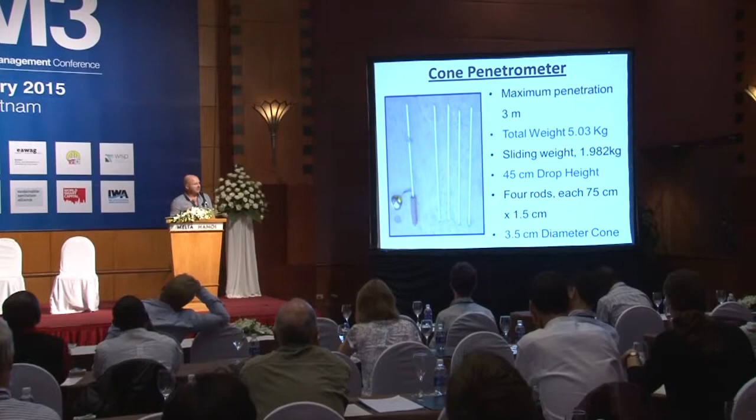Hopefully the video will start up. So it's quite simple, 45 centimetre drop with a 2 kilogram weight, so you have a consistent impact each time that you drop the weight. Quite simply, you measure how much the penetration has gone in each time.

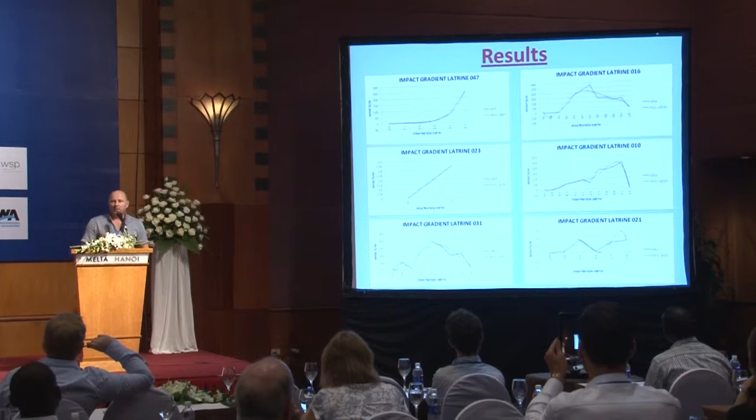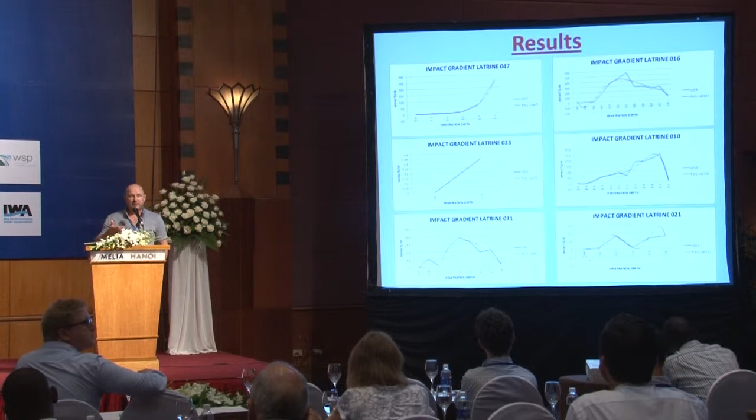So the penetrometer was able to demonstrate that there is a high variety of layers of sludge within a pit latrine. The top left there is what we expected to find: quite low resistance to penetration going to a higher resistance. If we look at the bottom right there, we had low resistance followed by high resistance, followed by low resistance, followed by high resistance. So that indicated that there were a number of different hard layers within the pit latrine. And this was shown throughout many of the pit latrines.

We had instances where it was hard on top, going to water below. So this is just an example of one of the pits. You can see that the pit is actually full, but we took the measurement and we had limited resistance, hard resistance, and then almost no resistance.

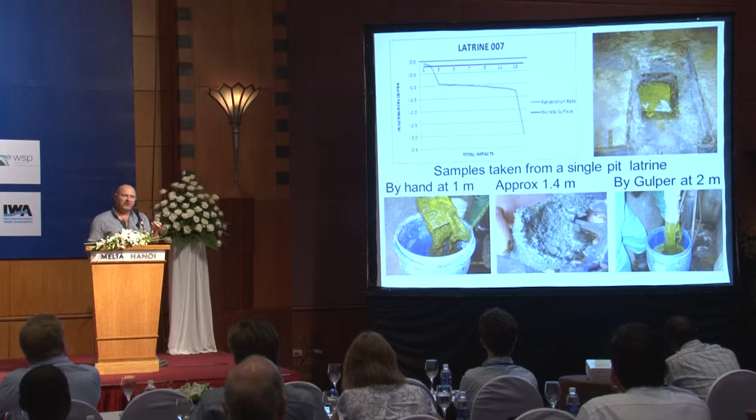So what we then did was we emptied it by hand at 1 metre. You can see there we've got quite a loose sludge. Then at about 1.4 metres I was able to take this sample, which was quite a dense honeycomb sludge, and then using the gulper, we were able to extract the water from below.

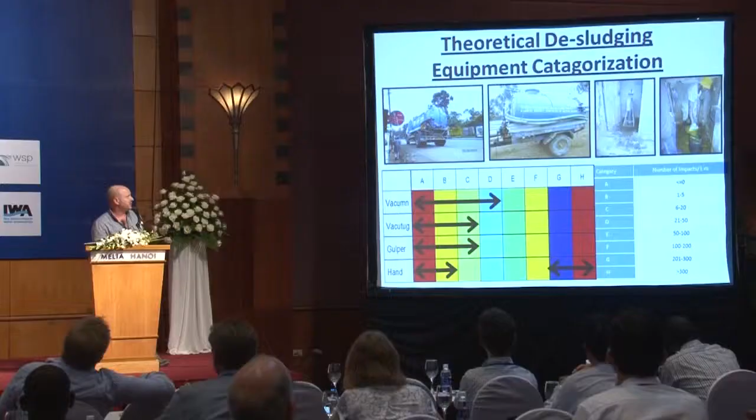So we took the 4 pit emptying technologies that were available in Kibera, which is the municipality truck, the Vacutug, the gulper, and the manual. I went to a number of pits and we tried how these would work within each of the densities, pushing the densities as much as we could. So I came up with a gradient, as you can see on the right-hand side, where we had no impact all the way up to over 300 impacts per metre.

From that I devised a theoretical graph where each desludging equipment could be put into this graph, and you would know its ability to work against a number of different sludge contents without having to add water. Obviously the municipality truck worked a lot better, it has a lot more force. The Vacutug was a lot less, and the gulper very much in line with the Vacutug. So what we found was that a lot of these would take moisture out, but they wouldn't take many of the solids.

The other thing for the tool that I ended up using is that a pit emptier can use this to help define what the pit is like before he goes in and tries to empty it. So that can come into pricing. If you have no information on your pits whatsoever, you can go and measure them, and before you spend any money from your pocket, you can help determine what you should or shouldn't buy. And I'll leave it there.

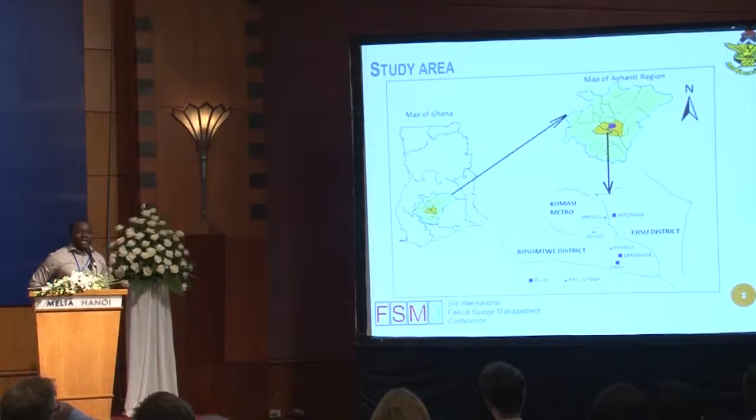The reason is that 85% of the Ghanaian population is being served with on-site sanitation systems. The main ones are the public toilets, which constitute 53%, and the public toilets are mainly from the KVIP and the pit latrine technologies. This has led to unregulated disposal of fecal sludge, which causes nuisance and serious health impact due to the lack of disposal and treatment facilities in this locality.

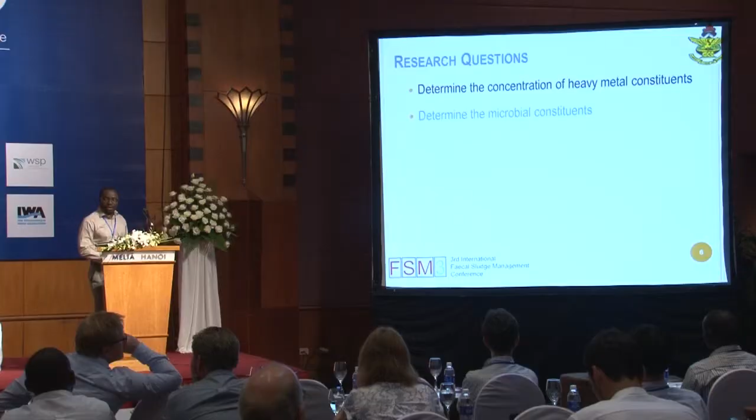So we need to find out the levels of these microbes and also the heavy metals and see the effect that they have on these manual dislodgers. So it led to the determination of the concentration of the heavy metals and also the microbial constituents. Some of the general conclusions from the study were that the levels of the heavy metals and the microbial loads exceeded what is recommended by the EPA Ghana. Comparing the rural and the peri-urban, it was realized that the peri-urban sludge had more heavy metals and microbial content as compared to that of the rural areas.

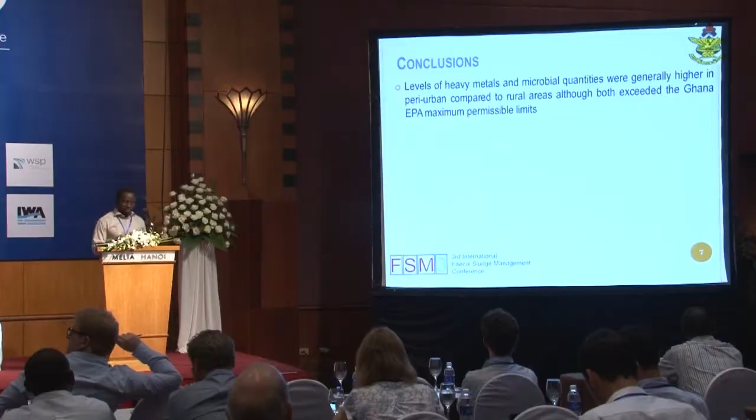We also realized that knowledge from these characteristics would be useful to design a particular treatment facility for this area, as not all treatment facilities are suitable for all areas. For further information, I have a poster there, and I can give details.

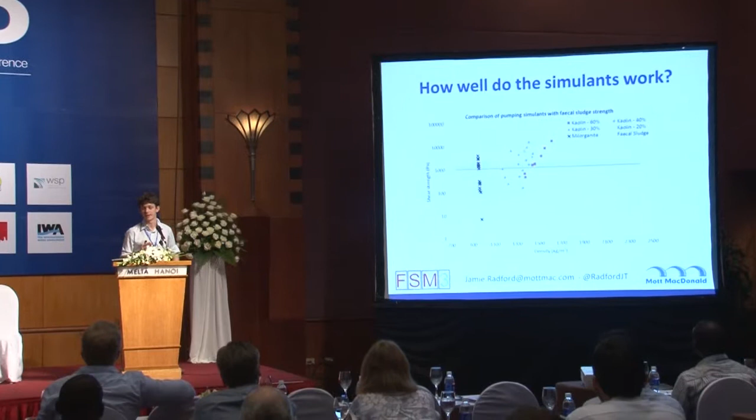The maximum strength that anyone's recorded that we know of so far for fecal sludge is around 2,000 Pascal. But all of the machines are maxing out before they get there. Our penetrometer was maxing out, and the rheometers used in the lab are struggling as well. So if you extrapolate that data, which we all know you shouldn't do, you come up to about 10 kPa. So that's why we've been going all the way up to 10,000 with these simulants.

And the other thing is density. So looking at the black one, the Milorganite is roughly a lower bound on density, and the coloured ones are different mixes of clay and topsoil, which are slightly higher density. The really wide ranges of fecal sludge are probably due to having inorganics in there, so sand, soil, and things that boost the density up to 2,400.

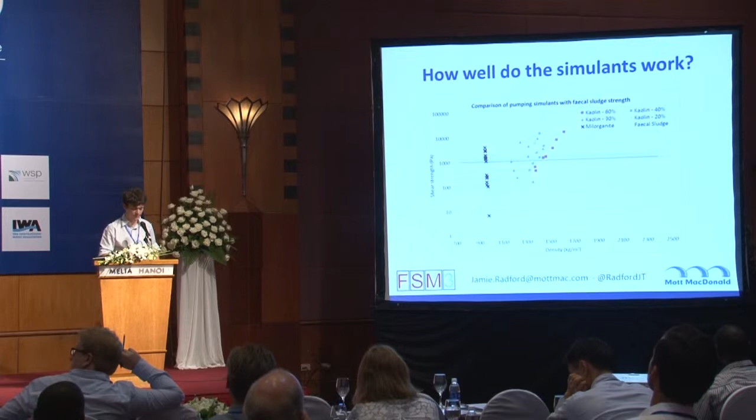We haven't just been developing these simulants, we've actually been using them in anger. So the work was funded by the Gates Foundation as part of the Omni-Ingestor project. In the middle there you can see a simulant of sort of 40% total solids that was being pumped. We added in 50% debris by mass, and that was done as part of the validation of those machines before they went into domestic field trials, and they actually worked remarkably well.

We've also been working with Water For People Sani Hub in Uganda. So if you saw Sam Alinga's presentation yesterday, you'll have heard of this already. They're developing improved manual desludging pumps. So on the left there you can see the Gulper one, and next to it the results from improved testing and development of a Gulper Mark II pump that can pump higher strength sludge and at a higher rate. So for the first time we're starting to get some real quantitative data on what all of these different pumps can do.

So to finish up, next steps. Sani Hub are continuing their work. We also have a student at Cambridge who's benchmarking a number of different pumps, so the two Gulpers that are shown here, also the Oxfam diaphragm pump, and the Omni-Ingestor manual pump. So we'll have 4 different pumps in there. We'll also look at things like vertical head lift. So we've got a few other parameters other than just the strength of the sludge.

And going forward, we want to use the penetrometer to start understanding pit performance. So understanding pit fill-up rates, why some pits fill in 6 months and others in 6 years.

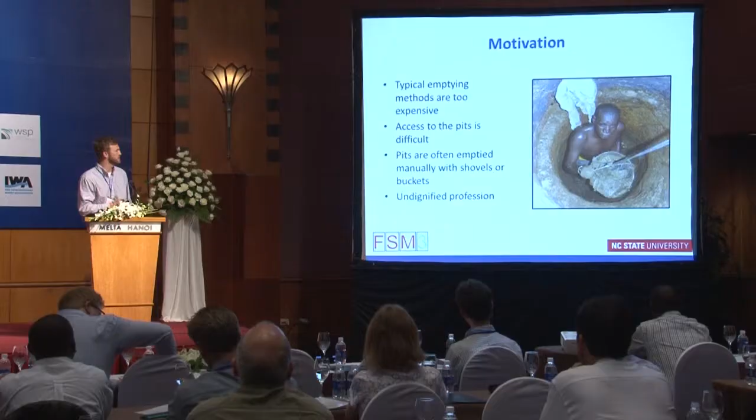So if you're not familiar with the Excrevator, it's a modified power auger, or more basically a screw that rotates inside of a pipe. As you see on the right figure there, we go up to the pit. There's a hydraulic motor that's powered by an 11 horsepower gasoline engine that rotates the screw and lifts the waste up through the pipe and out into receptacles. This version is version 3 of the prototype. It includes a dolly frame and a detachable bottom section to make it easily maneuverable to the pit.

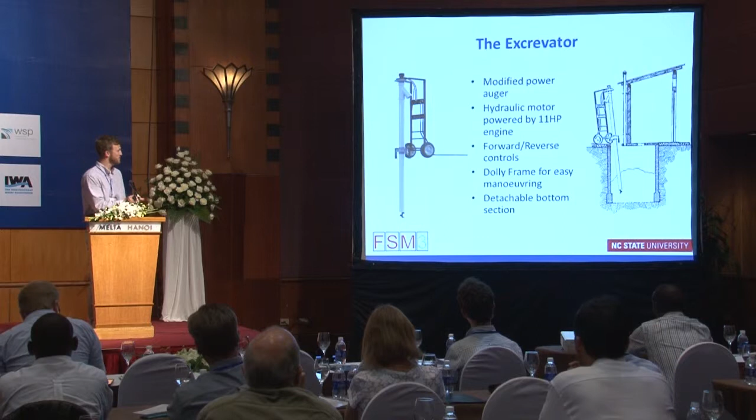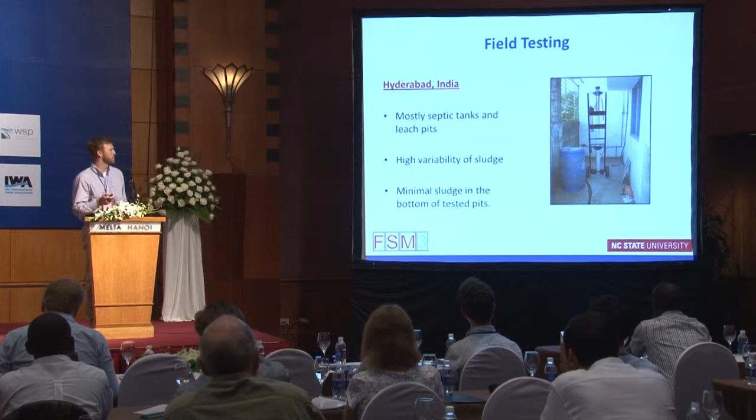So Phase 2 has been mainly focused on field testing, and we've been in 3 countries. The first was in Hyderabad, India. I should mention this was with the company that collaborated with us. Mostly septic tanks and leach pits. There was really high variability in the sludge, which Jamie can tell you is very common even within the same community. The biggest problem we found is that there was very minimal sludge in the pits. It was mainly water, and the Excrevator is more focused on handling the really dense sludge that's found in the pits.

Next we went to Durban, South Africa, and worked with UKZN there. In South Africa, they're moving to UDDT toilets, but there's a lot of dry VIPs that are currently still in use that need to be emptied. The biggest issue that you find in Durban, and I'd say these are probably the worst pits in Africa, is trash. As you can see there, there's not much waste in there, it's more trash than anything, so you can imagine the difficulties with putting any kind of pit emptying device in that pit.

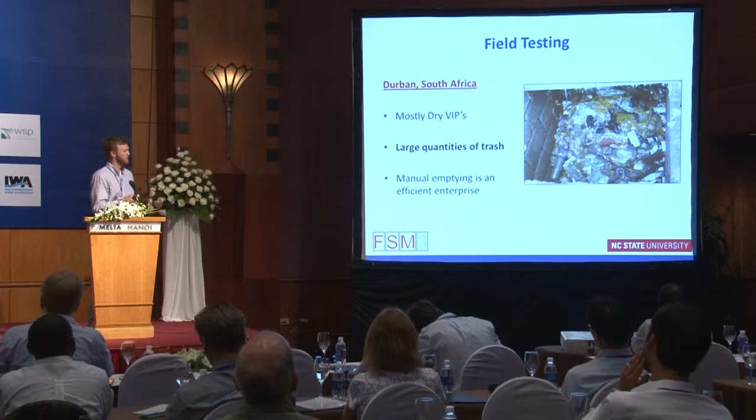Which is why in that municipality, manual emptying is a pretty efficient enterprise. These guys are pretty good with their long-handled shovels, but I haven't seen it done yet where there's still not shit around the pit and around the community once they're done. But it's the best option that they currently have.

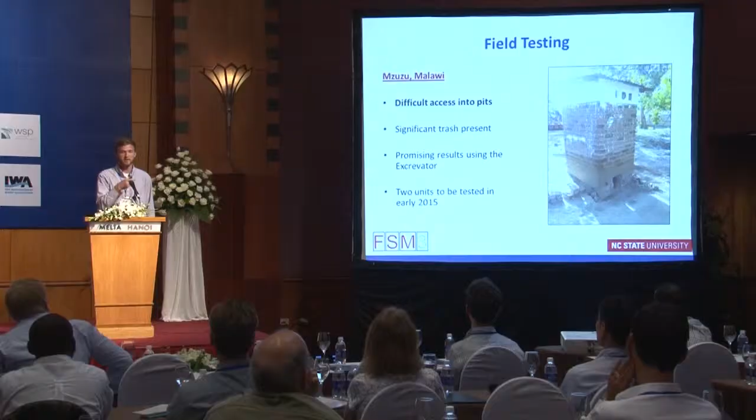And so the most recent field test we've done is in Mzuzu, Malawi with Mzuzu University. The pits there are difficult to access. One good thing about South Africa is that the pits were designed with pit emptying in mind, with access in the back, but here you either have to go through the squat hole of the pit, or through the side of the pit like we did here. They also have significant trash present.

You see here we developed a few fishing tools because the typical method is to fish out the trash first. So this is one of them pulling out a big t-shirt, and I always seem to find a pair of underwear in every pit that I've been in. That's pretty typical as well. But once we did get the trash removed, we did have promising results with the excavator. It emptied at around 50 liters per minute until we reached a clog and needed to unclog the excavator. So the biggest issue for us: it works with really dense solids, but you need to get rid of the trash.

And it's mainly fibrous materials such as shirts, t-shirts, plastic bags, such as that, which are in a lot of those. So we did have some promising results, so we're sending another unit to Malawi to be tested in parallel. And a lot of that testing is going to be done by Michelle and Mzuzu University. We have a lab set up back in NC State, which we use to simulate waste there.

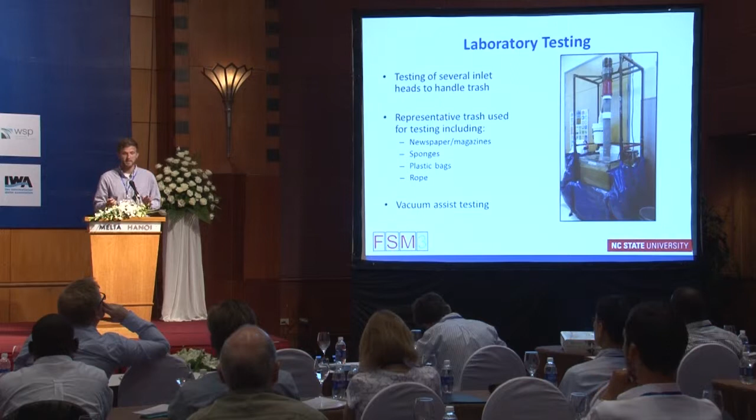We also have a field set up there to test different inlets, so we're trying to figure out ways to handle trash, including just rejecting it or using some kind of shredding macerator tool. We use representative trash that is typically found in pits. And we're also looking at using a vacuum assist, which kind of leads to where we're heading in the future.

And then we also just bought an open source power unit called the Power Cube 7 that can power all mechanical tools we're using, including the excavator and vacuum system, which is based on the eVac by PID, and the macerator that we're working on now. And so these can be used to empty either in a multi-step process where you empty the trash first and use a macerator vacuum system, or use simultaneous removal where you're using some combination of vacuum, excavator, or macerator. So we're trying to be able to handle the entire variability in waste that you find in pits, including the trash.

So in summary, the excavator is going to be a pretty effective emptying tool if the trash content can be managed. Like I just said, there needs to be an assortment of tools to empty the pits because they're so highly variable, even in one community from pit to pit. Two pits 10 feet apart would be completely different. So we have field testing that's continuing right now with 2 units that I mentioned in Malawi, and hopefully we'll be looking for some new field testing locations in the near future.